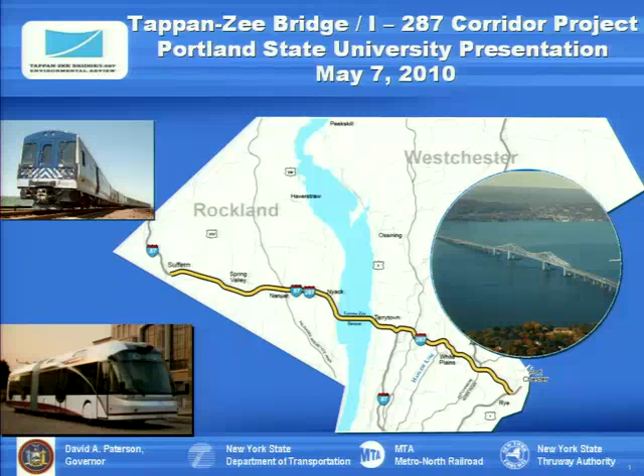The Tappan Zee Bridge I-287 Corridor Project is a collaborative effort with no less than three separate state agencies in New York State: the Department of Transportation, the New York Thruway Authority, which owns, operates, and maintains the Tappan Zee Bridge and approach highway system in Westchester and Rockland County, and the MTA Metro North Railroad. It's an odd gathering, to be sure. It's unprecedented, at least for the scale we're working with, and I'm here to tell you this morning that we are making progress, and not many people would accept that.

Just a very short overview. I'm going to give you a little definition and background of the project. History isn't really that relevant, except it does have a remarkable resemblance to what the folks on the Columbia River have gone through. I had the pleasure to meet with them this morning, and we have a lot in common. I'll talk briefly about a unique environmental process we've implemented to help narrow the focus and keep the project moving, then talk about the bridge, because without the bridge we're not in a position to talk about some unprecedented transit system improvements in this corridor. Then I'll get to the transit analyses and decisions made along those lines.

To set the stage, the New York State Thruway system, Interstate 87, comes down to the border of New Jersey, goes across Rockland County, across the river, and then heads down and ends at the city line. The interstate system does continue across Westchester County, tying into I-95 heading up to New England.

The Tappan Zee Bridge is quite literally the focus of the project. The bridge itself is 25 miles north of New York City. Most of the traffic crossing that bridge, and we're at 140,000 vehicles now, 160,000 on holidays and certain weekends, is through traffic. 70% of that traffic wants to do business in Westchester County or move on to Connecticut or up to New England. Only 3% of that traffic crossing the bridge finds its way into Midtown Manhattan.

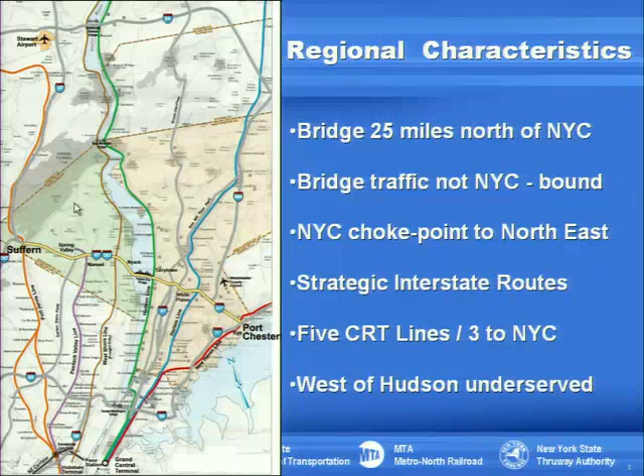The problem is there is very little significant east-west corridor transit capacity right now. So to that extent, the west side commuters are underserved by the rail lines. When you look at the commuters from the east side of the river going to Manhattan, 85% take commuter rail or transit. On the west side, only 10% take commuter rail or transit into the central business district in Manhattan. We're hoping that this improvement can do something to change that imbalance.

In the 90s, the Thruway Authority had to come to terms with an aging bridge, a bridge that had a poor design to begin with, was certainly not anticipated to carry the traffic that it does, and it really needs very significant attention. Given that need for a major investment, smart people got together with the governor and other transportation officials and private sector people in the state, and in 2000 they convened a panel that said, look, this bridge probably has to be replaced, and we think that's the direction you should go.

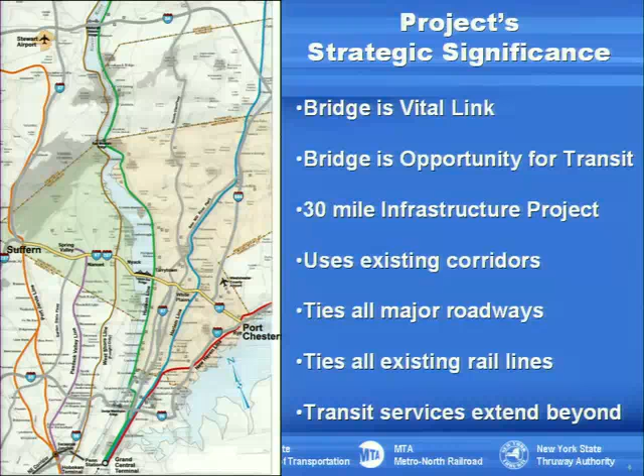But the existing 7-lane bridge isn't going to cut it, but we're not going to build this into a 10, 12, 15-lane bridge because that's very problematic in and of itself. So we replace the bridge, but we can't increase capacity significantly, so what do we do? We're going to implement east-west mass transit service to help with the congestion, but more importantly, provide mobility choices that do not exist today for the future. So we've moved forward on that premise since 2000.

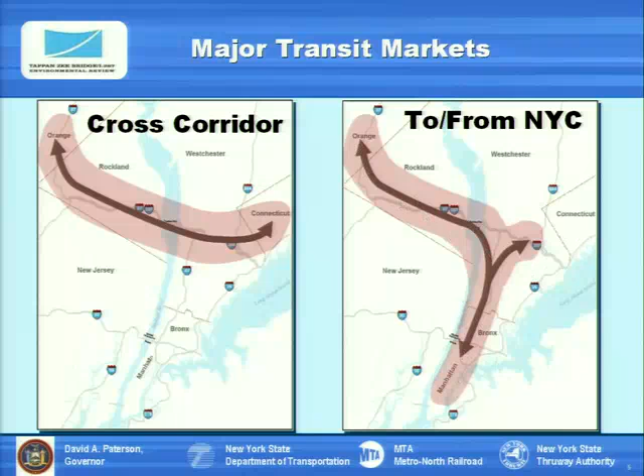One is no more important than the other. Both are vitally important for the region now and into the future. And we've come to grips with that and are managing that in the project. So how did we get here? As I said, the existing bridge needs a very major investment. The future traffic demands cannot be accommodated.

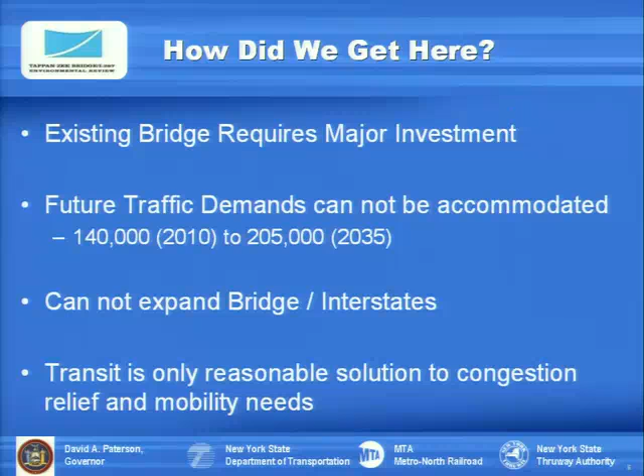Our 2035 projections for traffic will exceed 200,000 vehicles. That's on an 8-lane facility. If we modeled a 10 or 12-lane facility, those numbers would be all that much greater. Problem is, if you gave additional capacity on the bridge, it's going to become a very expensive parking lot unless you extend those capacity improvements through the approaches. And in this case, where the traffic comes from and wants to go is most of that 30-mile corridor. So you're kind of defeating the purpose. You're feeding a fire that will just get more and more out of control. That's why we're putting a lot on the future of transit in this corridor.

So the decisions have been made, and they're very significant. The project started in 2002, but by the end of 2008, we did a lot of rethinking and came up with a way for us to make critical decisions. We've decided the bridge has to be replaced, and I'll spend a couple of minutes on how we got there and why. We've decided on a new state-of-the-art bus rapid transit system to handle that east-west market demand for inter-county and intra-county trips.

And we've settled on extending the existing north-south commuter rail service on the west side of the river in an east-west connection across the river, tying into the Hudson line, which is working at about 50% capacity.

That line of the three on the east side of the river has the most excess capacity and can handle this additional service from the west side of the river. Not going to go through this, but like the Columbia River and like most major projects, things take a very long time. And the reasons for that are many. Sometimes you have a good idea to begin with, and you don't know quite how to get to where you need to be. That's what happened here, in all honesty.

In 2002, the Thruway Authority and the railroad company got together with Federal Highway and Federal Transit and said, we want to replace this bridge, we think, but we have all these options for transit. So they spent a lot of time with a very robust public participation phase, got a lot of ideas, and by the end of 2005, they came up with 6 alternatives. But those 6 alternatives were very complicated, and they involved different types of transit systems, including light rail.

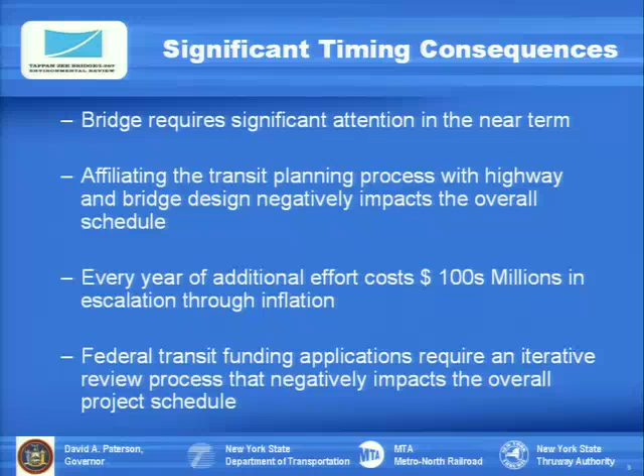On top of that, the process that the Federal Transit Administration has for projects to be evaluated and to become qualified for federal aid is very, let's just say it takes a long time. And there's a lot of intricacies involved. So what are we going to do? We've got to fix this bridge. That's why we're here in the first place. We want to get the transit right. That's going to take time. It seems like we can't catch a break here. How do we get this thing moving?

Well, in consultation with our federal partners, we've decided to implement tiering. Now, tiering in and of itself is not new. It was started in the 70s, they told me, where you have a Tier 1, which is a planning level of analysis, followed by a subsequent Tier 2, which is a full-blown environmental impact analysis. Tier 1 gets you authorizations to proceed. You set critical components like alignment, logical termini, major important components of your design. And the Tier 2 is where you come in and settle on all the details.

What we've decided to do, and we've got concurrence with our federal partners, is to do a Tier 1 design development and impact analysis concurrent with a Tier 2, which is the traditional analysis we need to go to permitting and construction. We're moving forward at the same time, planning for the transit systems and designing a transit-ready bridge and highway system. So that at the end of this process, we will have authorization to go, replace the bridge, make accommodations for the trains and bus in the bridge, and in the approach systems.

To the extent we need to modify the approaches, we'll leave space, build a portal, what have you, so that the subsequent Tier 2 transit actions will result in those approvals where we can come in and implement that service. It is tantamount to changing the bicycle tire while you're moving. We pulled it off.

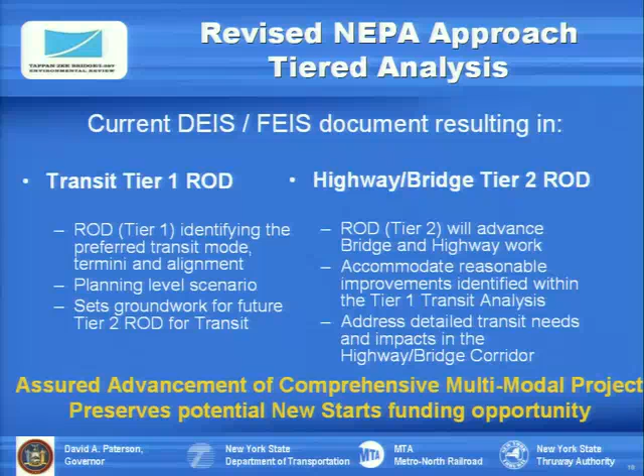We were certain that the concerned communities, politicians, would have thought this to be some sort of way for the agencies to back away from the commitment to transit. It is not. We were able to show them that this is the most sensible way to advance the project and the most likely path to success. So that's what we're in the process of doing in terms of the federal environmental process.

The bridge, very quickly, to give you context. It's an amazing bridge in that it's the strangest looking thing you've ever seen. It's 3.5 miles. It's got 2 curves. It's at the widest part of the river. Why would you want to build a bridge here? That will take a 1.5-hour seminar. Can't go there. But it's comprised of no less than 5 sections with 4 different structural types. And the reason for that has everything to do with at the mud line and below.

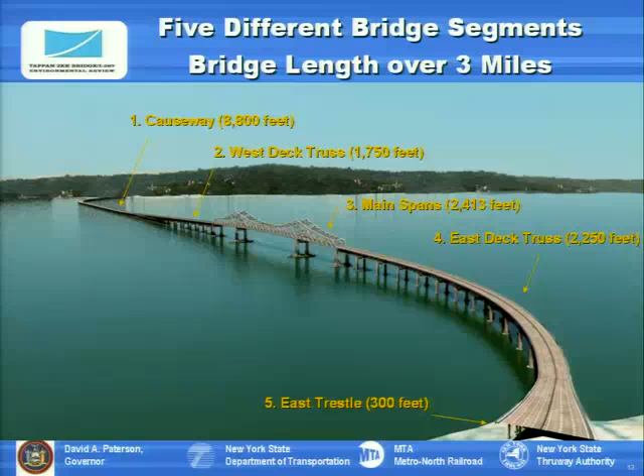The western half of the bridge, the low level, we call it a causeway. It's not a causeway. It's a series of 169 simple spans, 50 foot long. Why 50 foot long? Because the mud and muck is about 600 foot deep, and in 1952, when they designed the bridge, they said, let's keep the spans short to keep the load light. Let's have a very thin deck and keep our fingers crossed. They thought and accounted for having to shim the deck as there was differential settlement. It never happened. But again, I digress, I'm showing my true colors as a design guy.

The bridge, when opened in '55, had 3 lanes in each direction and an open steel grating mall area. 91 feet from out to out, giving us today a usable roadway width of about 87 feet. In 1993, the Thruway Authority replaced that center mall, made it a structural deck, and installed a zipper barrier that gets moved twice a day.

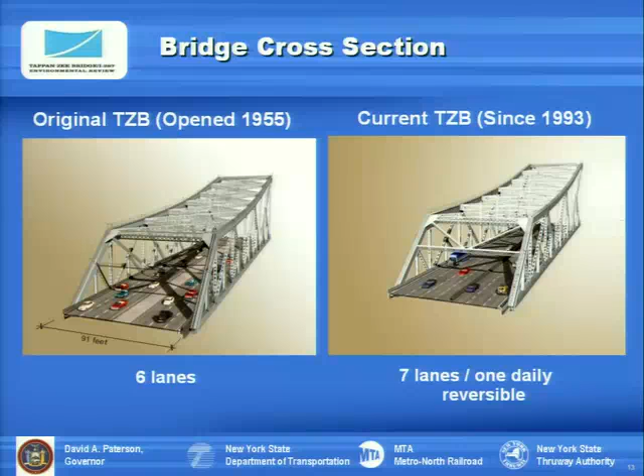What we need to accomplish in the replacement bridge is to eliminate that lane imbalance. So we're going from 7 lanes to 8 lanes. We are going to add 2 additional lanes for bus rapid transit, which may or may not involve an HOV or HOT lane. We're accounting for it in the analysis as a BRT, HOV, HOT lane. We are going to install safety shoulders because the existing bridge alignment cannot change.

Those curves are problematic. The grades are very challenging, very high percentage of trucks, and on this bridge, the accident rate is 4 times higher than the rest of the Thruway. And the level of accidents are particularly horrific. And it's not the trucks that cause the accidents, it's the vehicles that hit trucks that are the problem. When I talk about horrific accidents, I'm talking about fiery infernos with high levels of loss of life.

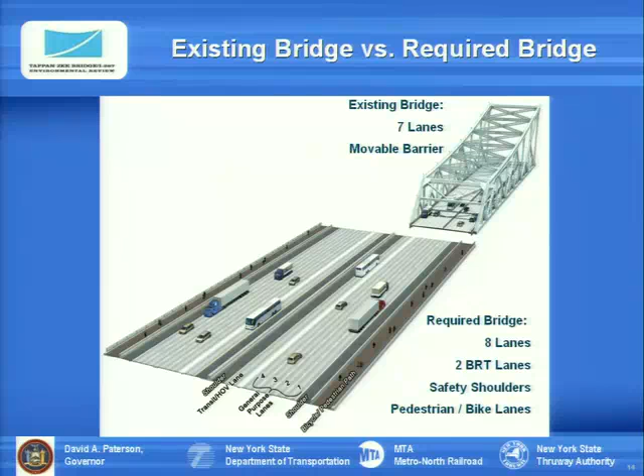We're also, last but not least, going to make considerations for bike, peds and non-motorized transit, which is not accommodated today. So that takes you from a 91-foot bridge to a section that wants to be close to 200 feet wide.

Also, early on in the process, there was an assumption by the Thruway and Metro North, well, nobody would really want to rehabilitate this bridge, so let's just look at the rehabilitation option and then dismiss it because it just won't work for us. Well, we wish that life were that easy. In order to do a comprehensive analysis, you need to look at what you need to do in a rehabilitation scenario that accomplishes the project goals and objectives, the same thing that you would get in a replacement scenario. So we evaluated what it would take to accommodate that new bridge section.

And these three, option 2, 3, and 4, are representative of what it would take to maintain the existing bridge and then add to it, if you will, to supplement what's missing in the existing bridge. And what we looked at was a bus-only option or a bus and train option, both in rehabilitation and replacements.

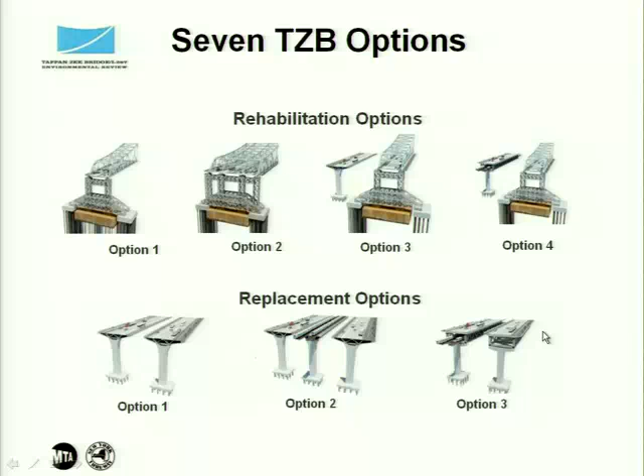What we found out is that the amount of work necessary to do rehabilitation options compared to replacement options, the difference was, dare I say, insignificant. Can I say $200 million being insignificant? But the fact is, it really is. When you compared like scenarios, here's the commuter rail rehabilitation, $6.3 billion, and replacement, 6.4, 6.6, call it 6.5. Bus only, 5.1 to 5.2.

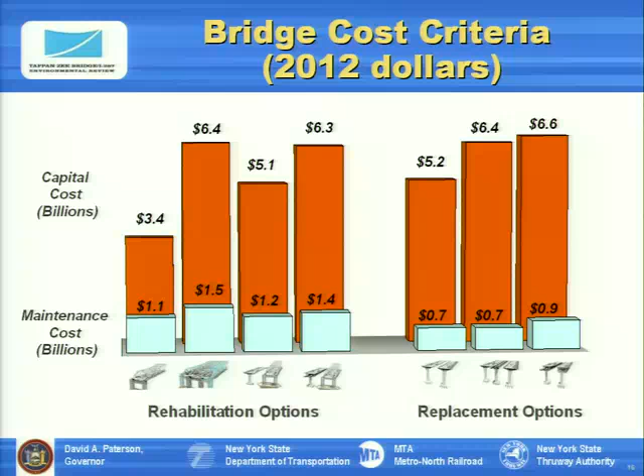It's not only construction costs and life cycle costs; this analysis was very comprehensive, it also looked at environmental factors, in particular, involvement in the river. And the decision to replace the bridge has been documented and signed off by the federal agencies in a scoping update.

Rehabilitating the existing bridge is not viable. It doesn't accommodate transit and does not address operational problems. The other rehabilitation options that do accomplish that require very extensive work in the river, just as impactful, and in fact, ironically, the rehabilitations are more impactful because of the need to maintain traffic. River impacts are comparable in all options, and all of the rehabilitation options will retain that main span and those approach spans, which will continue to deteriorate as long as they're in place.

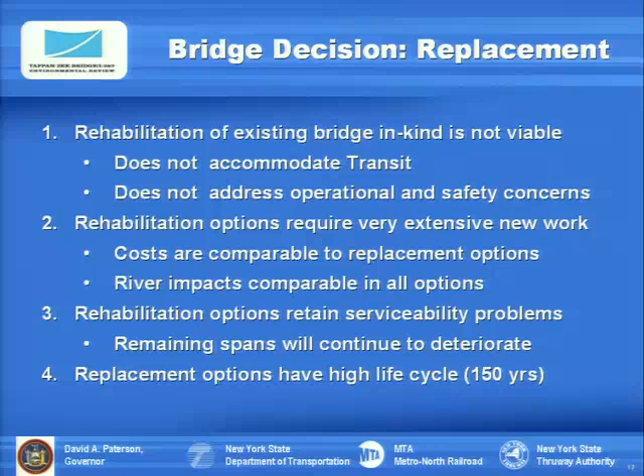So this is now what we're studying in the DEIS: to oversimplify, a single-level solution and a dual-level solution. Not dissimilar to this project that I visited out here this morning.

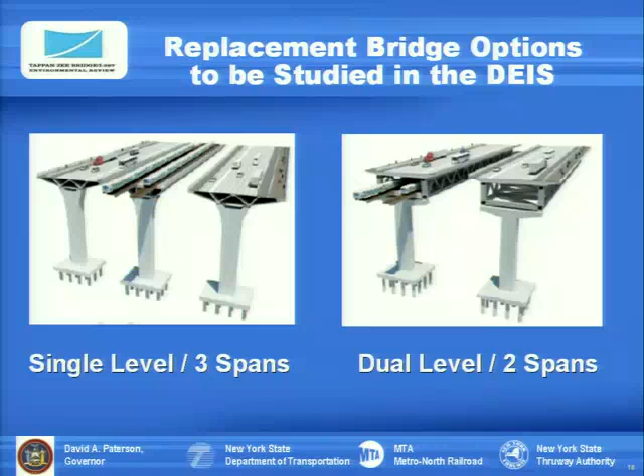Why 3 structures? Because we think it's highly improbable—if we were to design it as a single structure, any contractor in the world would want to come in and value engineer it. But more importantly, if we go with a single structure, which is about 100 feet wide, about 13 feet wider than the existing bridge, we can put the 8 lanes and buses on half of the bridge, if you will, until the second half is done. It just works out much better in that configuration.

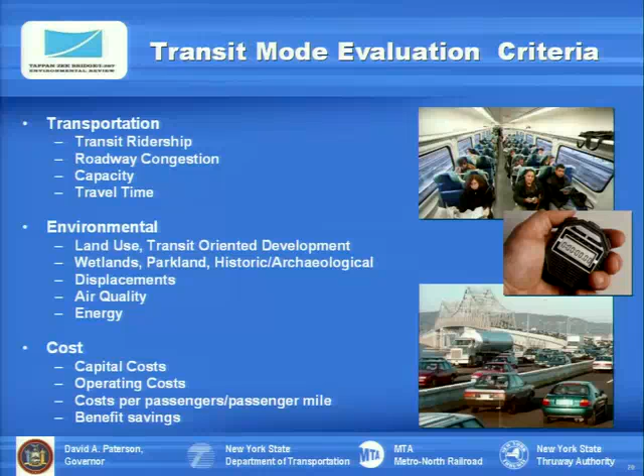We also undertook in 2008 a very comprehensive transit analysis. The transit mode selection report was undertaken, and this took into consideration not only the obvious transportation issues but also environmental and cost aspects. So this is a very informed, very comprehensive analysis. The tools used for that—federal guidelines require us to use the locally approved MPO forecasting tool.

The MPO in New York that has jurisdiction on this project is called NYMTC, the New York Metropolitan Transportation Council. It's comprised of representatives from the tri-state area: New Jersey, New York City, Long Island, 5 counties in the lower Hudson, and 2 counties in Connecticut. The best practices model, the tool, has been approved by the feds.

This model works on input from the 28-county metropolitan area. It has all major and minor routes, all transit routes—buses, trains, subway systems—and provides traffic and transit ridership forecasts for any or all specified links in that system. It's fed by the demographics, also provided by federal requirement of the MPO—that's the demographic, the growth pattern, the employment numbers, the job shifts, and what have you.

So we're using the tools that we're mandated to use. This tool, this system, is so encompassing that when we started using it in 2003 it took 7 days to do a run—after you set your inputs and made the improvements for whatever scenarios we wanted on the bridge, or for whatever transit links or new stations we wanted to add. Now, with the strides made in hardware and software, we're down to a 5-day run.

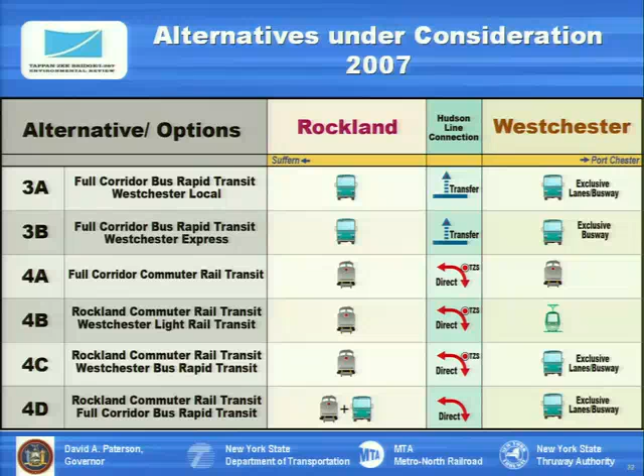What is the transit system that will work best, that we want to move forward? And is that the transit system we will evaluate in the DEIS? You don't need a DEIS to decide what system makes the most sense. We were working at it, and in fact we weren't going to undertake six EISs to evaluate systems that didn't warrant any further evaluation. Sounds very simple now, but unless you live through it and are responsible for getting somewhere, and have to bring your federal partners along with you, it can take some time. But it was an exercise that was worthwhile because in the end we are comfortable with this measure.

This is ridership projections. We looked at air quality. We looked at time savings. We looked at cost benefits, cost per mile. Any measure you can think of, we've taken into consideration. But all of the results reflect the general ridership trends.

The combination of this commuter rail and new bus rapid transit system that we're now pursuing is going to give us, in our design year, 79,900 transit trips just on this system. That's in addition to the 200,000 plus that are on the Metro North commuter rail system every day. And in 2030 that's probably going to be up to 230, 240 - I don't want to speculate. So this is not insignificant.

Another point we needed to make, especially to our critics and detractors, was that this is actual ridership, not a capacity analysis. This is an actual forecast. In truth, the commuter rail numbers, if you put them into the FTA model today, the FTA would say this train's not a good idea because you don't have enough passengers. That's one way to look at it. Another way is that this train on day one is going to be about 40% capacity, which means we have that much more opportunity for additional ridership growth.

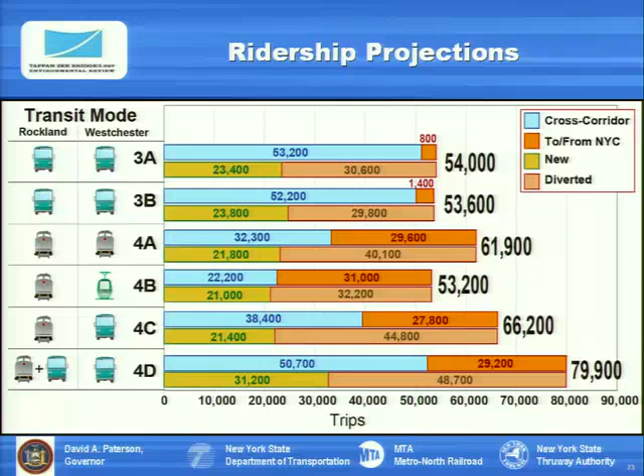And the buses are very, very flexible. Almost limitless in terms of capacity - how many buses do you want to run? So this was a very comprehensive, even-handed, and very conservative approach to this analysis.

For consideration, we were looking at one alternative that not only came across Rockland County, not only came across the river and connected to go to Manhattan, but also continued across Westchester to tie into that Connecticut line. That didn't perform as well as the bus rapid transit does in Westchester County because of the lack of stops, frequency, and what have you.

But it was a $14 billion investment that represented that 30-mile two-track extension. The combination of buses and trains that we are now advancing is in the neighborhood of $7.5 billion - roughly $6.5 billion for the commuter rail and $1 billion or so for the bus rapid transit. Again, this is a snapshot if we were going to build this project, cost it out in 2012.

When you look at the entire project - the cost of the bridge, the cost of the necessary adjustments to the approach highway systems, and the transit components all in one - that's where we come to, and I'm not making it up, the numbers are it's less than $16 billion. It's 15. It's a very famous number in New York nowadays, only $16 billion project. But I say, hey, I didn't pick the most expensive - you give me credit for not going for the $22 billion project. But that's where we're at.

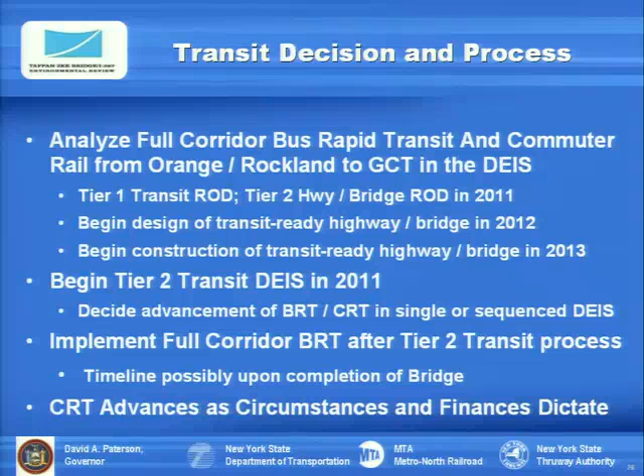The facts are that moving forward, we're analyzing these systems in the DEIS, and we're going to do it in a tiered manner. We'll follow immediately with the next Tier 2 transit study, most probably BRT alone, but it could be BRT and commuter rail together. We've got time to figure that out, and we'll have it figured out by the time the FEIS is done.

With the commuter rail system, we're going to build a 15-mile, two-track extension, tying into an existing system that goes another 40 miles out to Port Jervis, with connectivity to northern New Jersey. People from northern New Jersey, we could conceivably get New Jersey Transit to consider coming north and putting a spur across Rockland County on our new service.

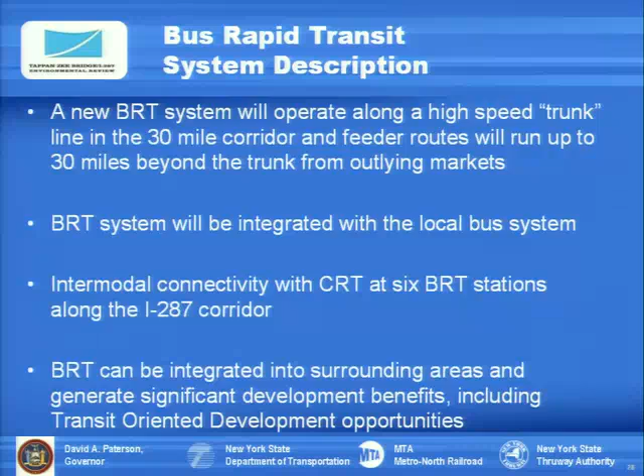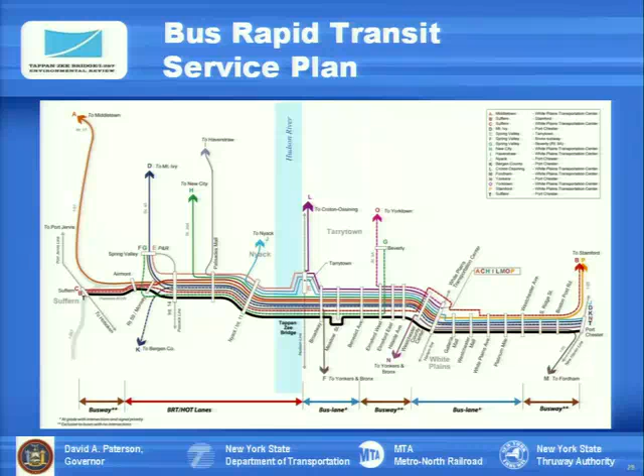When they're on our trunk line and in our trunk line stations, they'll operate at a high-tech level with level boarding platforms, offline fare collection systems, and informational kiosks that give you the location of your bus. Those vehicles can operate on regular streets less efficiently, but that's how they'll run on the feeder routes, at least initially. The other attractive aspect of buses is that it can always expand at its own pace.

The difference now in the EIS is how will these buses operate. They can run in dedicated separate busways, in a shared-use facility like an HOV or HOT lane, or in dedicated lanes integrated into the local street system. They all have their advantages and disadvantages.

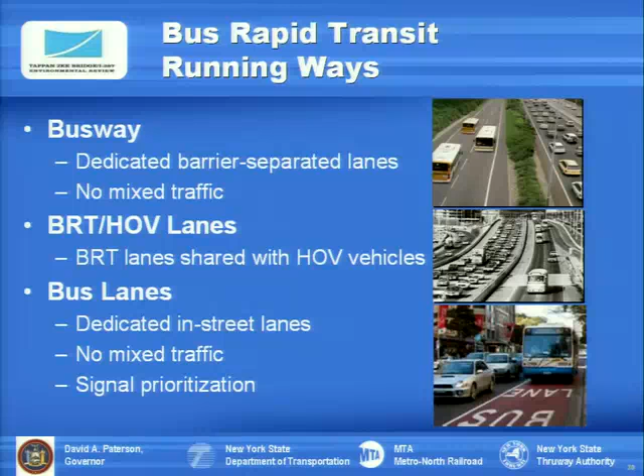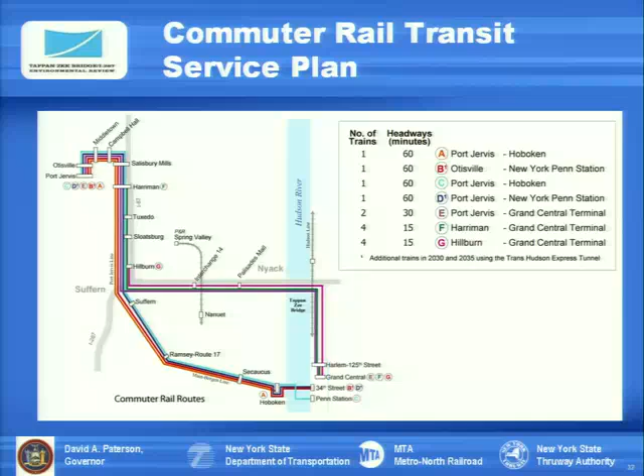With respect to where it will fit in our right-of-way, we're looking at median applications, particularly on the south side. The Thruway right-of-way is approximately 250 feet, and for most of the 15 miles in question, we have more than adequate space on the outside to run a 2-track facility. We'll settle the rail alignment first, since rail has the least flexibility and needs to go where it needs to go.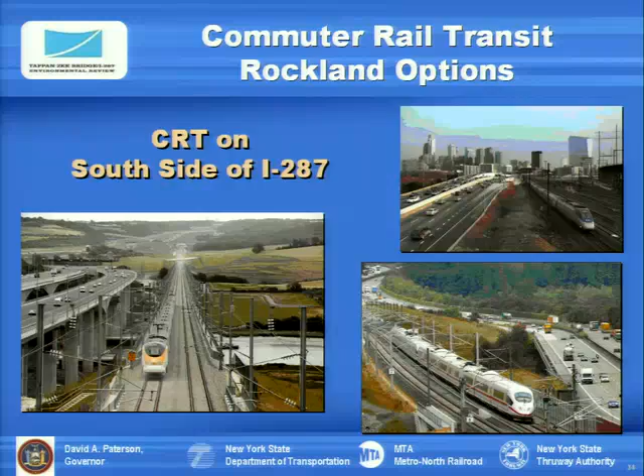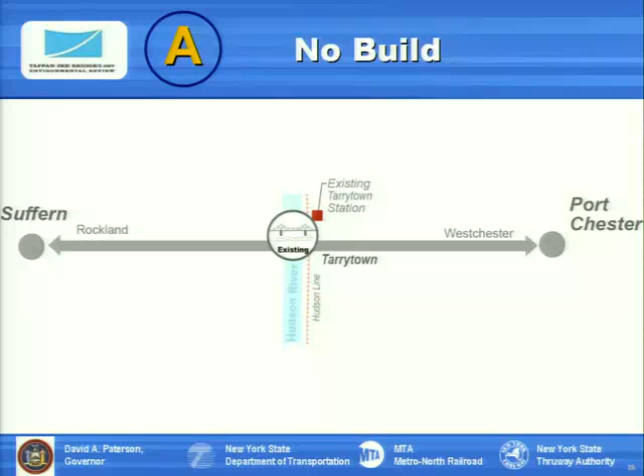Then the variables to be evaluated in the DEIS are what BRT running ways will work best, and what those impacts are. So the alternatives we're considering in our EIS include the no-action alternative for comparative analysis for the future.

We're looking at 4 build options that all include the same commuter rail option. The difference will be in how the BRT system operates.

Will we have a completely dedicated busway for the entire trunk line, all 30 miles? We're evaluating that.

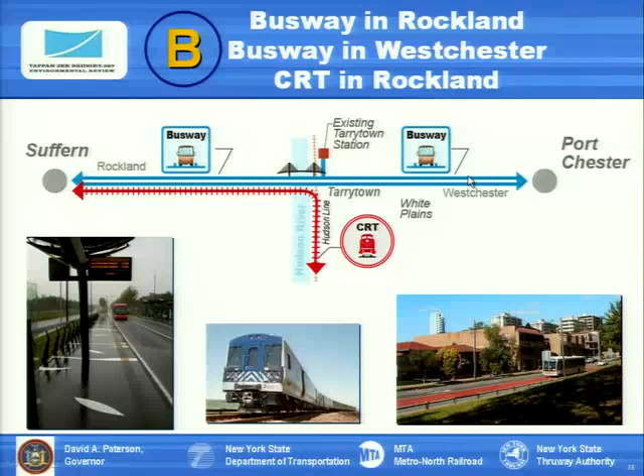What if we had a dedicated busway in Rockland County, and then integrated into dedicated lanes with local traffic in Westchester?

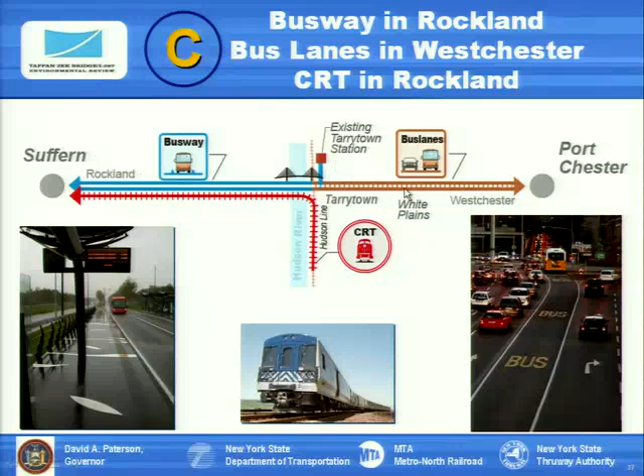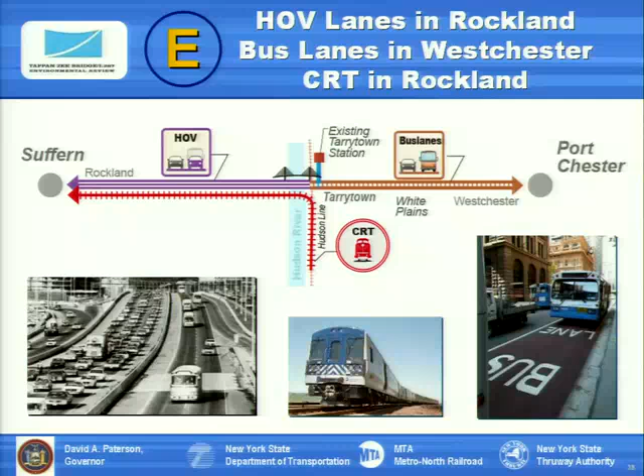What if we had shared-use HOV lanes in Rockland County with a dedicated busway in Westchester, and HOV shared use on the west side paired with in-street integration on the east side?

So that's where we're at. Right now we are in the DEIS production phase. We are doing the design year forecast analyses, the highway design, the environmental impacts, and the comparative analyses.

By the end of the year, the team will have a document ready for federal review, the draft EIS, if you will. Depending upon the length and outcome of that review, we're hoping to have public hearings and publish the DEIS next year, maybe this time next year.

After the hearings and resolution of comments, in New York it's our practice to then announce the preferred alternative, and working with our federal partners, move toward resolution of the FEIS and records of decision.

In order to get this approved by the feds, ultimately, like everyone else, we have to show how we're going to pay for it. So we're also working diligently on coming to terms with the necessary financial plan decisions that need to be made.

It looks like we've got about another year before the study really needs the commitment. It's not that we're going to take our time for a year—it gives us another year to do whatever arm-twisting or back-to-the-drawing-board scenarios need to be done in terms of getting the commitment to the funding.